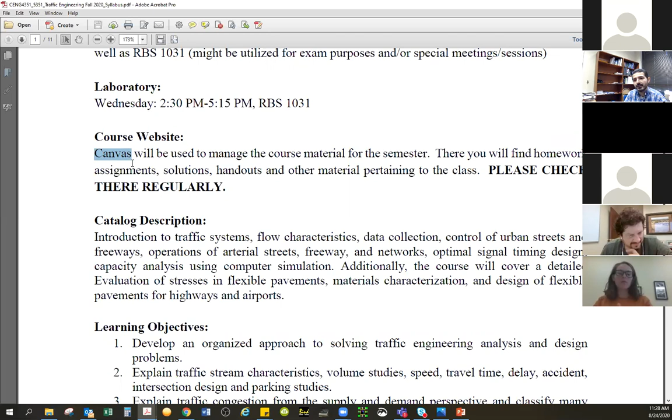Again, Canvas, make Canvas your friend. I think you're gonna make use of it this semester way more than any other semester, not just for this course, but for all the other courses.

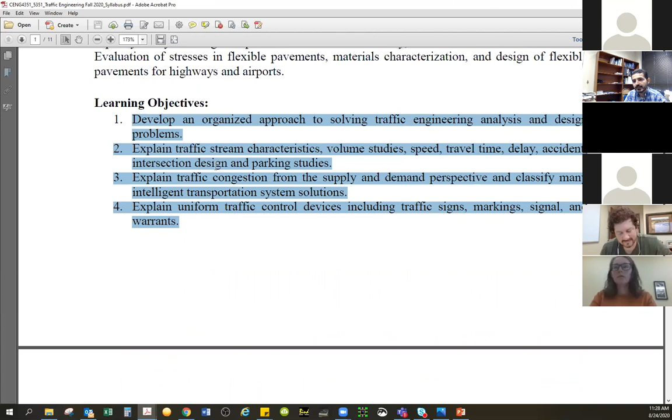The objectives, again, I'll talk about those more in the PowerPoint slides. The prerequisites, I hope everyone here took 3351. The textbook is Traffic Engineering, and this is the textbook right here, Traffic Engineering by Roess, the 4th edition. If you want the more recent edition, that's fine, but I'm fine with the 4th edition. It's more than sufficient, and I'll be assigning homeworks and even picking exam questions from the textbook.

So again, you have the ISBN number here if you want to get that. I think it's a good book, especially for the ones who are planning to maybe work as traffic or pavement engineers in the future.

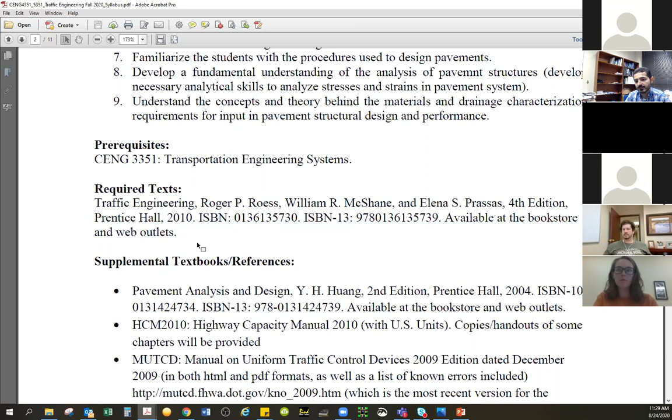There are multiple other supplemental textbooks, especially the first one. This one is very important towards the end of the class. You do not have to buy it, I'll provide you with all what you need. But it's a good book if you have extra resources to get it. It's a very good book, and I think we have a couple copies in the library. Again, I'll be providing 99% of what you need from that book.

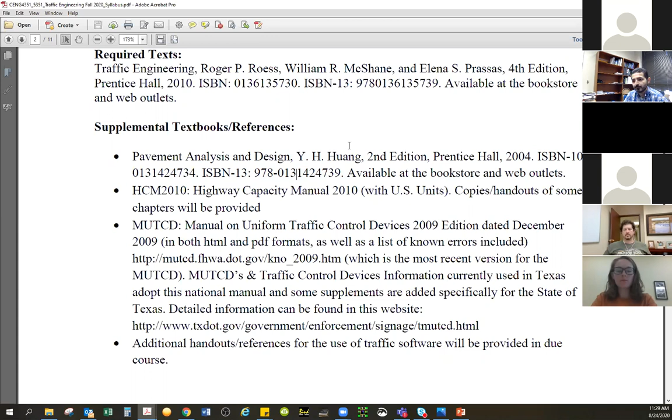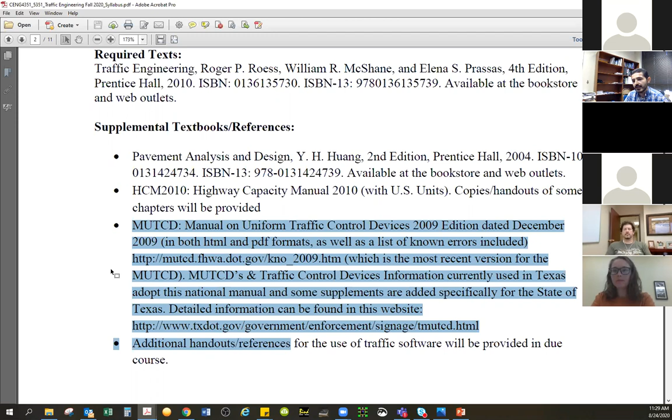There are other supplemental references that you can get easily by visiting certain federal or Texas websites, such as the Manual on Uniform Traffic Control, the 2009 edition, and other handouts.

The schedule, and I'll put a big question mark on the word tentative here. We've seen, we used to put that word lightly in previous semesters, but this one, I think we don't know whether we're gonna have a fully functional semester, like we can meet at least for labs, and you guys have maybe other courses that you're meeting in person.

For the ones who may ask, what happens if we have multiple cases of COVID on campus? I really don't know. That answer is above my pay grade. We will get to hear about this if, God forbid, the numbers are increasing. I hope that's not the case.

But if things change, either we'll do it half and half, live Zoom or synchronous, asynchronous, and the labs may or may not get to see you guys. These are the topics that will be covered, no matter what modality we end up using.

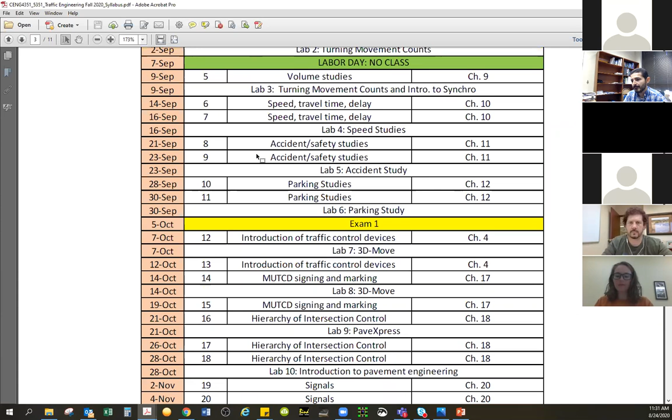We're going to start with chapter 1 and then chapter 5, and we'll have the labs. We have Labor Day on September 7th, no class that day. The exams are preset: Exam 1 will be on October 5th, Exam 2 will be on November 9th.

After Thanksgiving, there's no labs or anything, everything turns fully online. For this class, you won't feel a difference because it's some sort of hybrid, but we're going to finish the last lab just before Thanksgiving, on November 18. Questions so far?

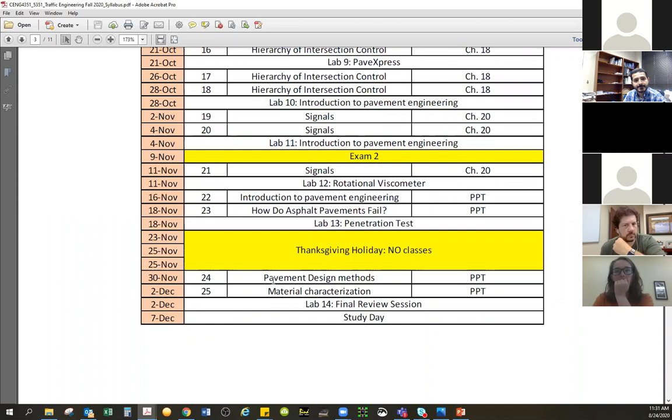So here, this is the 3rd page of the syllabus. Exam 1 and Exam 2 are preset. The final exam is still to be determined.

Homeworks - the due dates are already on Canvas. And the 5% extra credit is going to stay the same as I used before in 3351.

For graduate students, not sure if the two of them are here or not, but we can have a term paper, and the term paper topic will be assigned by mid-September, so about 2 to 3 weeks from now. The lab, we're going to meet in RBS 1031, at least for the first two-thirds of the semester.

Let me grab that here if I have it, or maybe I don't have it in the office. The micro tally is equipment that we're going to use to measure the amount of movements at certain intersections in the city. Typically, we pick an intersection that's very close to campus. I've used University Boulevard and Old Omen before.

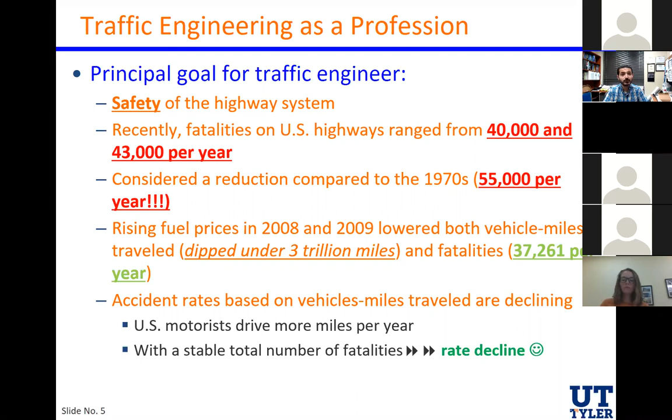Other reasons besides people just driving less that year explain that decline—we're starting now to be more serious about removing dangerous drivers from the road. DUI and DWI enforcement is stricter nowadays.

There is improved vehicle design, so many things now in our vehicles that were not there 10, 20, 30 years ago when our parents or grandparents drove. We have padded dashboards, collapsible steering columns, seat belts. Even seat belts, you'd think it's a given, but it wasn't mandatory up until the late 80s. It was your choice whether to use it. But studies show over and over that there's a need for it.

Airbags and anti-lock braking systems, and this list I feel needs updating, there's so many other design aspects. Autonomous vehicles are coming up now, or we already have some models.

Even if you're trying to change from one lane to the other, I drove a car about a year ago, I don't know what model, and when I was changing lanes it didn't allow me. The steering wheel put me back into the lane because there was a car in the blind spot that I didn't see. So many of these aspects will eventually help reduce this number.

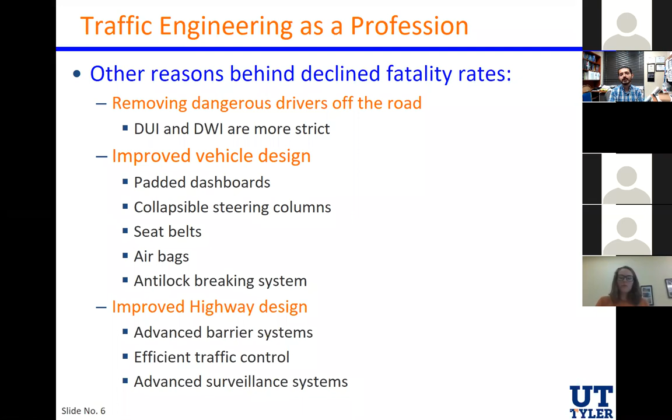So besides safety, if you really achieve safety, which should be your top priority, then there are other objectives that you need to achieve as well. So the first one is speed. Again, people want to get from point A to point B as fast as possible. Again, assuming safety is already achieved, but you need to think of that as well.

How can you have as many lanes as possible, wide lanes? How can you have a shoulder in case there is an accident? We can move the involved vehicles onto the shoulder and keep the flow continuous. All of these should be part of an objective: speed, comfort, physical—what are the physical characteristics of the vehicle and the roadway that can make things comfortable while you're driving on it?

Convenience—how easy it is to make a trip. Economy—cheap. Again, you need to make sure that you're not letting the driver wander in the middle of nowhere to get to where they want. Again, as short as possible, and this is going to make it a cheap option to be used and utilized.

Environmental compatibility—going green, and how can we make use of materials like rubber or any other, or even the shingles on our homes when they get used, how can we crush them and add them again into the paving technologies. So all of these are important.

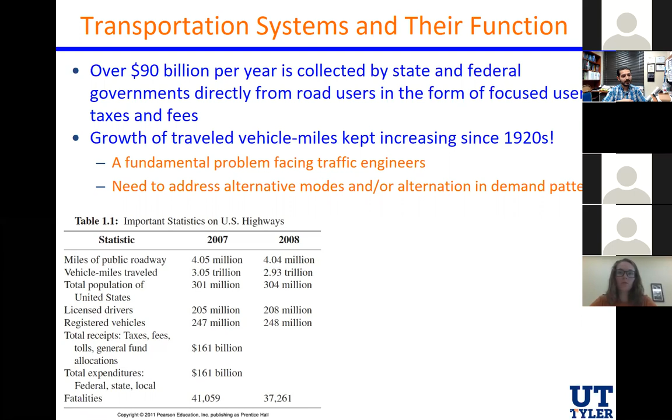You're going to ask me what happened in 2009 or 2010 - numbers went back up again because of more exposure.

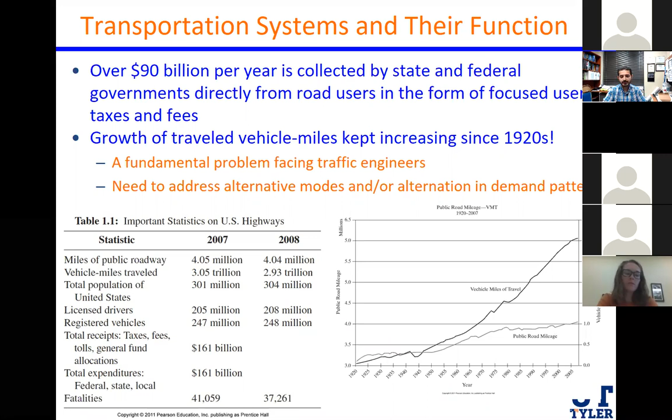And again, we are stuck here - it's very hard to convince people yet to move from driving their own vehicles to public transportation. But we've seen it more now in Dallas, Austin, and Houston, and now with the big high-speed rail system that's going to go from Dallas to Houston, that can also change the game a little bit, at least for Texas. Other states are doing similar projects as well.

Transportation demand is related to two things. Demand will always keep increasing because of land use patterns and available transportation facilities. It's basically all about zoning.

So zoning means every piece of land has a different designation, so you can't just use it for whatever you want. Some land is residential, so you can only build homes there. Other places you can only build malls, hospitals, offices, or roadways. That's the land use pattern, and it changes sometimes with time. Sometimes we change the pattern by need, and it has to be approved by the city council and so on.

But what's interesting is whenever we build a new transportation system — and by system I mean more than just a roadway, it has multiple lanes, a shoulder, signals, that's why we call it a system — whenever we build a new one, the adjacent land all of a sudden becomes more accessible and more attractive for development. We've seen this over and over.

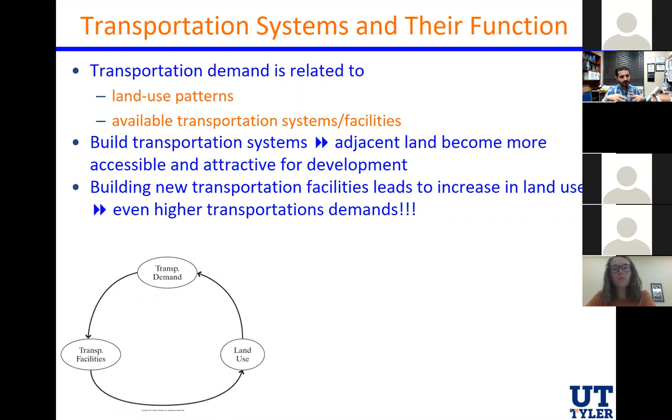And we typically get into this loop. It's very hard to break through. We have transportation demand; once we see that demand, we do a traffic study, like what you guys are going to be doing next week. We build a transportation facility. Once I build one, now there's land use. That land use means people are going to move in, they need more, we build more, and so on. It's hard to break, as I said.

A big example happened on Long Island, New York. As they were building the Long Island Expressway, development of suburban residential communities occurred, and within two to three years they exceeded the anticipated 20 years' traffic demand. You build a roadway wide enough with enough lanes to handle 20 years of traffic growth, but then you invite many more people to come and invest and live there, so they exceed the demand within that short amount of time.

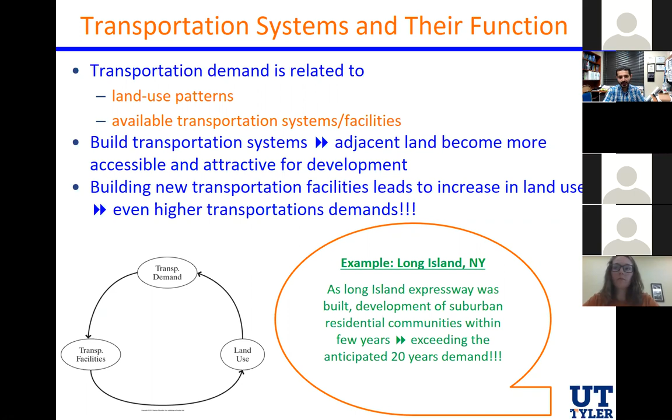That's the way it is, and that's why whenever you go, especially to Dallas or even here now, they're trying to add lanes, trying to keep increasing transportation capability.

Last thing before I let you go: there are two functions important to maintain — mobility versus accessibility. These are two different things, and I'll let you ponder them more. Mobility is the ability to travel to many different destinations with relative ease — you can go to many places easily. Accessibility is the ability to gain entry to a particular site. There's some similarity, but they're a bit different, and you have to maintain both.

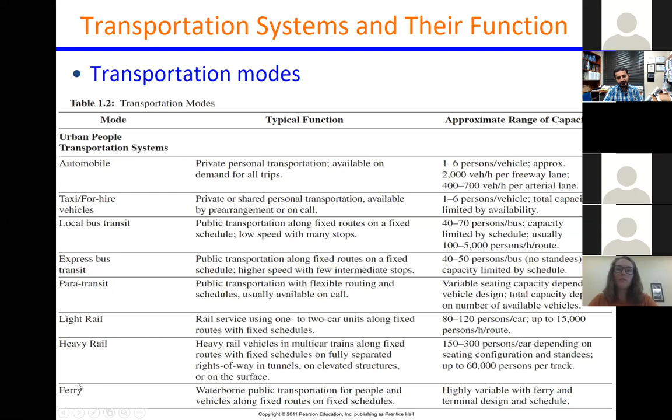This table shows the transportation system and its functions. We have lots of modes of transportation. The one we handle the most is the automobile, of course — what's its function, what's the approximate range of capacities — but there are many other modes of transportation that can be used.

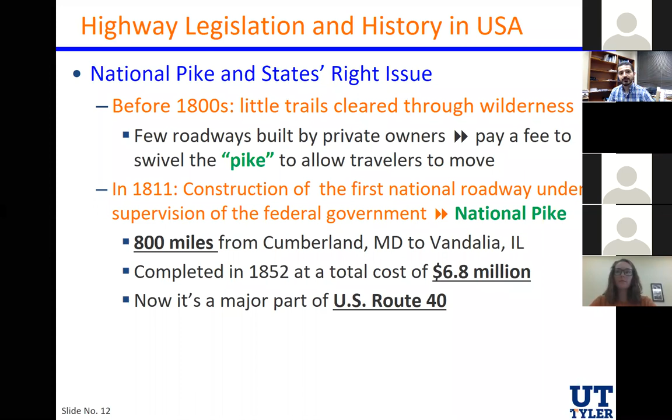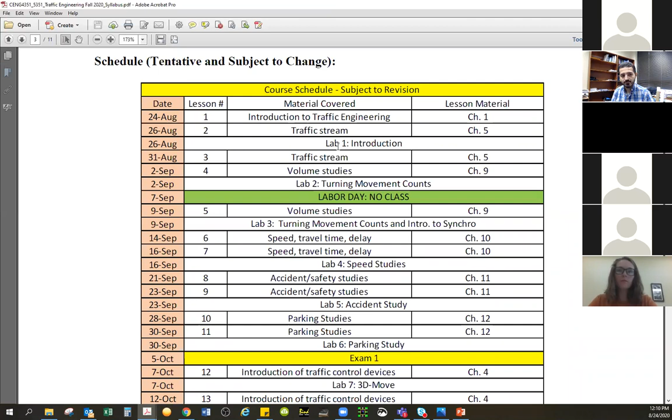The good news is for the first Wednesday lab, we'll have some time. If you take a look, can you guys still see the PDF file I'm sharing? For the first Wednesday lab, it's basically an introduction, so the whole class does not have to come. What I want you to do is go to Modules, and click on the first lab, which is just an introduction, nothing much there.

I want you to open the safety policy contract. I think you've done that before in some other labs, at least in codes and specs. Read it, and please sign the last page, then send it to me, or I'll create a submission location here on Canvas. This is going to be considered lab 1. There's no credit for it, but you need to sign that contract.

So what's next now? The first homework is not posted yet because I haven't finished. On Wednesday I'll finish the first chapter, and at the end of it I'll announce the homework. So there's no homework yet.

For the labs, I need the groupings by tomorrow 5 p.m. For those who just came in late, I need the groups formed by tomorrow 5 p.m. Every group is going to have 5 students. If you cannot find a group, it's fine, just let me know and I'll eventually pick random people to form a group. But I thought it would be a good idea to leave that to you guys first, so easily contact 5 among you here to form a group. I'll let you do that.